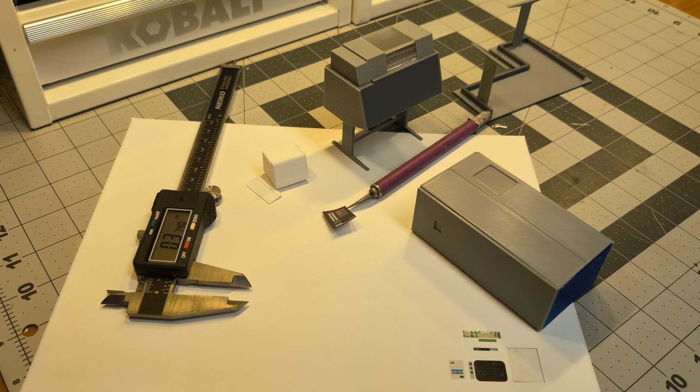So exactly what am I doing here? Well, it occurred to me that if I'm going to have a mainframe channel called My Little Mainframes or Ernie's Little Mainframes or what have you, I probably should have some little mainframes.

And I got an idea from Nicholas Timisi's wonderful little 1401 model that he created, which I featured in one of my videos. I think it's the third or fourth video, maybe the third video.

I have several 3D printers which I use for all sorts of different projects. When you're like us, or anyone who's watching this channel, you're probably into all sorts of fun tech things and tech history, and we're curious to a fault, as they say. Well, that's me. So I have my 3D printers, and although I wouldn't call myself all that good at designing, I'm not terrible, and that's just my opinion.

I use a little product called Tinkercad, which is dirt simple, free, online, doesn't require anything, but you go to the website, you sign up for it, and off you go. It's from Autodesk, which makes the venerable AutoCAD software, something that I have had decades of experience with.

I was an AutoCAD professional back in the 90s. I even taught AutoCAD, I even had all the certifications. I went so far as being on the board of the people who wrote the AutoCAD certifications, and traveled to San Rafael, California on a number of occasions, but that's a different life. Now as a retired guy, I have lots of time to play with all sorts of fun stuff, and this is exactly what I'm doing.

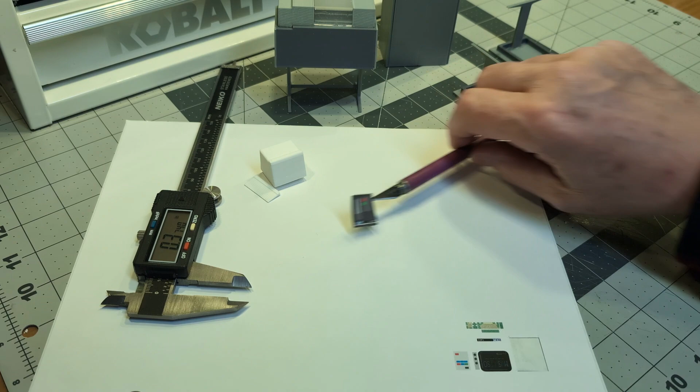So here is my little set of prints, and right here we have what will be in a moment a little 3090 mainframe. This is a cool little 1403 printer, not so little in the real world. And right here I have a desk, but it is currently gluing. Using this wonderful stuff, the E6000. Don't get this on your pants, whatever you do, because it will never come off. But you can glue all sorts of stuff together with E6000.

Anyway, what I had been doing was using various graphic tools. Actually, one of the best tools in the world is just good old drawings.google.com. Google makes some essentially basic but rather usable products that you just use online if you have a Google account. One of the things I did was mock up or create a little graphic set from all sorts of resources on the internet, popping stuff in there and shrinking it down.

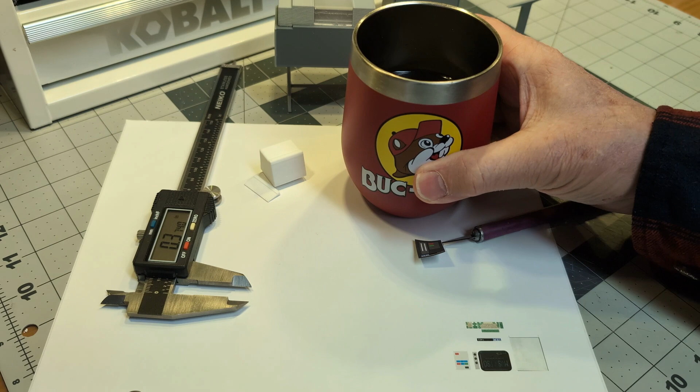Excuse me for my hands, but I talk with my hands, as it were. Oh, and hang on one second here. If you've been watching my channel, if you've been a stalwart follower of this fun stuff we've been doing, here it is. There she be, the Buc-ee's cup with the Tim Hortons coffee. I don't know how I thought this up, but we all have our vices, right? Hold on.

Anyhow, so I mocked up the graphics on paper, and then I got some really pretty cool stuff here. You can get this for $12 on Amazon, the Avery full page stickers. Now the full page stickers have no separations, there's just an entire page of sticky paper. So what I did was print this once I was satisfied with the size, carefully cut it out using the X-Acto knife, and try not to go through the backing paper, but you can. Reusing this over and over until, of course, I used up all the space.

So here we are, here's a little decal. Here's the front of the 3090. You can tell your friends that this guy who has this little mainframe channel is a whack job, because after all, who would go through all this? I do. I think this is more fun than a barrel of monkeys, and I've never seen a barrel of monkeys. So anyhow, here's what I'm going to try to do: get this on here so that it doesn't run all over the place. There she is. What do you think, gentlemen?

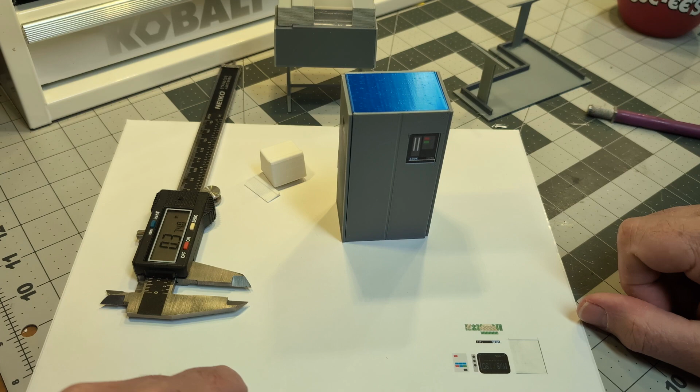I'm pleased with this. Now, one thing I did was I printed this in what they call speed mode, which means it's not really great. You can see there's a lot of serrations, but this is just for fun. If I really wanted to perfect this, I'm not sure I do, because there are so many other models of things I want to print, mainframe related and so on.

This is just for fun. Your friends don't have this. Nope.

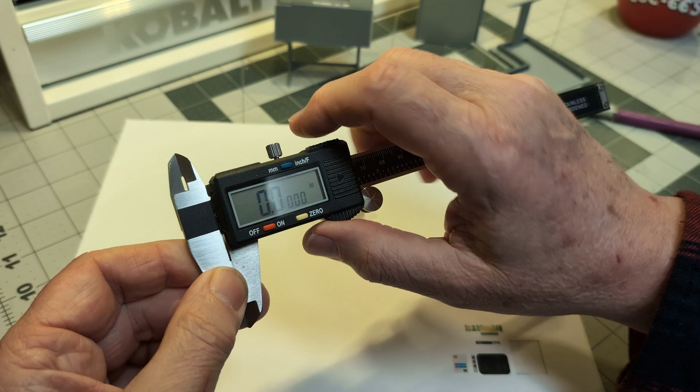Let's try this here. Let's just see how hard this is going to be to do. A little bit of care here. Watch me foul this up rather nicely, but we'll see how this goes.

If you're a model maker, and I have lots of time under my belt as a model maker, you know that you just don't slice away. You have to finesse it. You have to be careful with it. You have to treat it nicely, and then it will do what you want it to do.

So 2 or 3 runs over this with the X-Acto knife. Always have a sharp blade. Sharp blades are the key to happiness. Dull blades are the keys to losing your finger.

Okay, almost there. We'll see how this thing goes. Almost. I'm feeling a little bit of drag, which means a burr is starting up on the X-Acto knife, which I don't want. Can you guys see that okay? Man, I'm a little bit too far under here. Let's just try it from here.

All right, hang on, almost done. The sound of my voice. Okay, all right, let's peel this guy off. And no, I went through. Even I'm not that good, but we'll see.

Well okay, here we are over at the computer, and this is Tinkercad, and Tinkercad is free from Autodesk. I think originally the purpose of Tinkercad was to lead people into the Autodesk line of products, which in and of themselves are rather expensive. And for most people who are not doing this professionally or in a production quality environment, you can't justify the cost of some of these products. But there is a product called Fusion 360, which you can use.

I don't particularly care for it, and it's not because it's not capable. Oh, is it ever capable? I just don't care for the workflow. And if you are in this kind of environment, you know that workflow is everything. If you're frustrated and not happy with the way your workflow works, you're not going to be happy. So I didn't particularly care for the workflow, even though I took some of the online classes from Prusa, which is my 3D printer supplier of choice. I do love my Prusa printers.

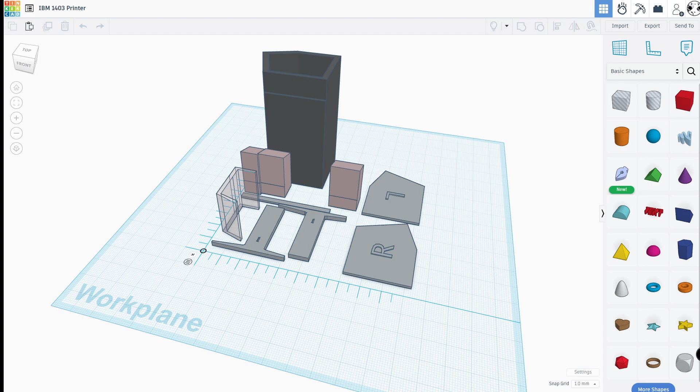I decided to stick with Tinkercad, and a number of people I know do the same. Even though it may look, for lack of a better word, childish, it is, I repeat, far from childish. Anyway, here is the 1403 printer that I designed, and really it's just a basic thing here.

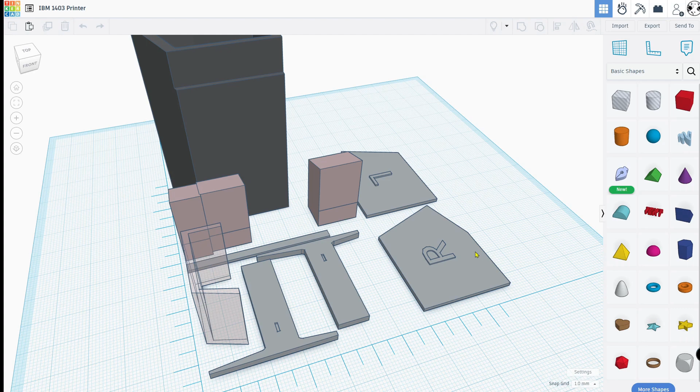It is all the pieces that would go into the way you would construct some object. How can I put this easily? You just have geometric shapes that you stick together in such a way that in the end it turns into what you want. And you add them together and take them apart and do all the things that you do until you have the piece that you want.

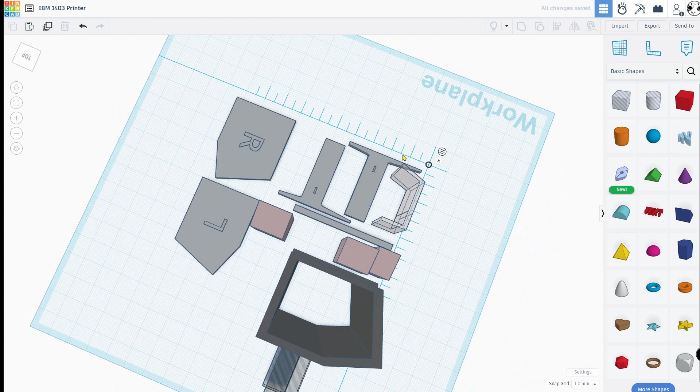So for instance, here's the main body of it. And I cut a hole in it because who needs to have a big thing full of plastic? And what I can do then is break them down into their constituent pieces and have my way with them until they look as I want them to be.

So, for instance, these two little things sticking out here, they're not actually the legs. They're just the thing that tells the computer or the design to take some space out of this black thing to make room for the legs. The actual legs are over here.

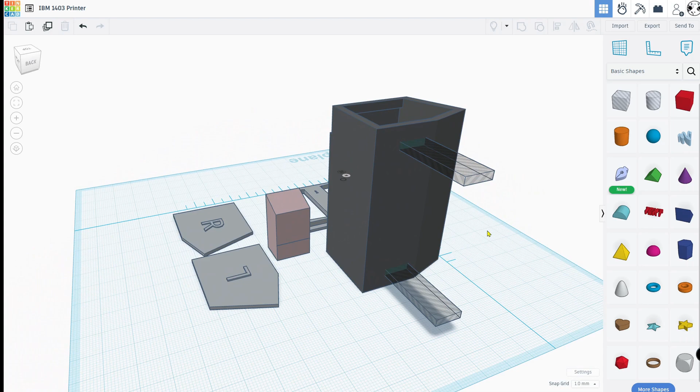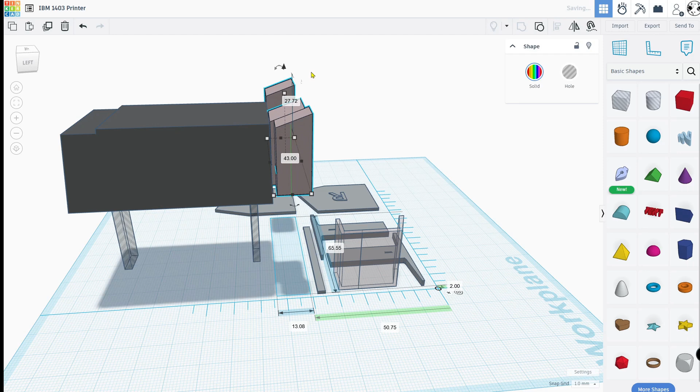This is not going to be a class in Tinkercad, but all I'm trying to say is there is a way to make things without losing your mind, and this is my design tool of choice. Hopefully you can see how this is starting to show what it's going to be here. Real quick, I'll finish this, and then we'll get off of this because it's not really mainframe related, I know I'm going somewhere outside of that scope, but I think you'd find it kind of fun to see.

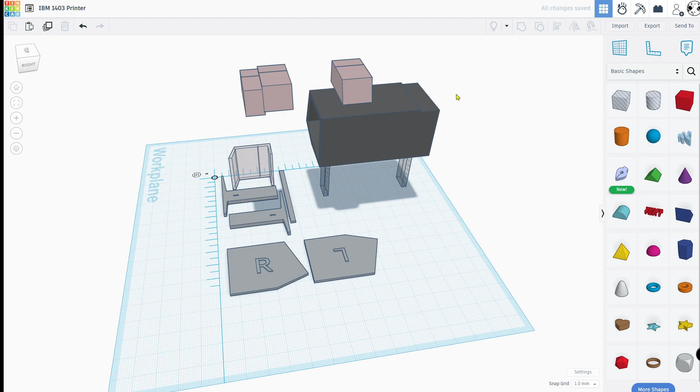All right, let me just finish doing this here so we can play with it. Let's turn this around completely the other direction. Don't worry if it doesn't make any sense — it doesn't make any sense to a lot of people. Let me see if I can make everything align properly. Probably can. You see how this is coming together?

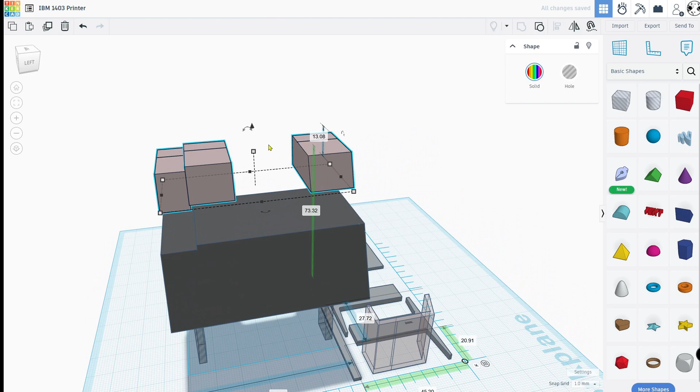And then I just sort of drag this down to the top and say, all right, let's have a look at that and make it a little bit more flat to see. And there it is. That's how you do it. It's not really rocket science, is it?

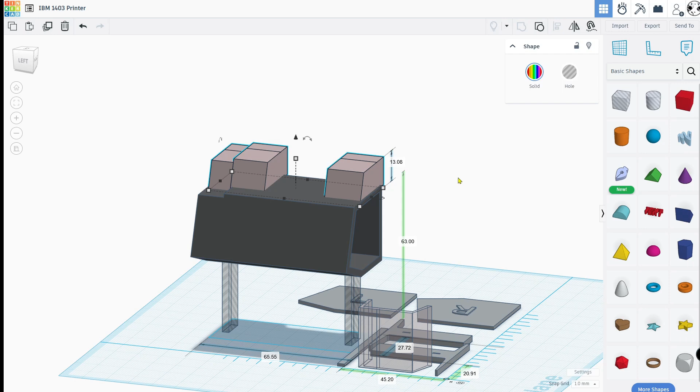So I just sit there using pictures that I find all over the place and the IBM documents and manuals and everything, and I put together what in this case is going to be, or was, a model 1403 printer. The STL files mean that if you have a 3D printer, or know someone who can do this for you, all of the constituent components — like the side panels, the legs, and even the clear glass that goes in between where the paper would come out — are all available in the links that I'll put there.

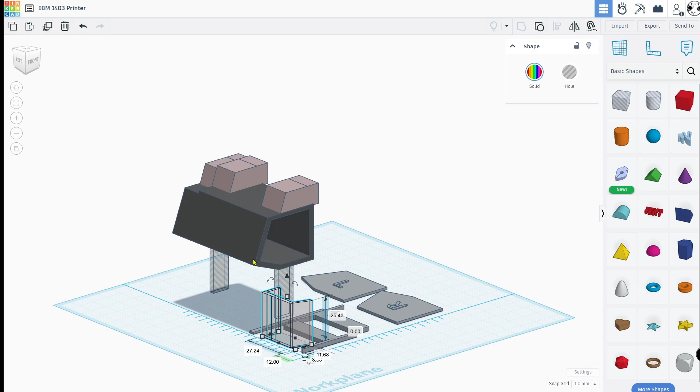And if you know somebody who wants to try this, have at it. The only caveat is caveat emptor — this is for fun. So if it's not going as you'd hoped, if I can help, that's great, but I really don't know how. This is kind of what you see is what you get.

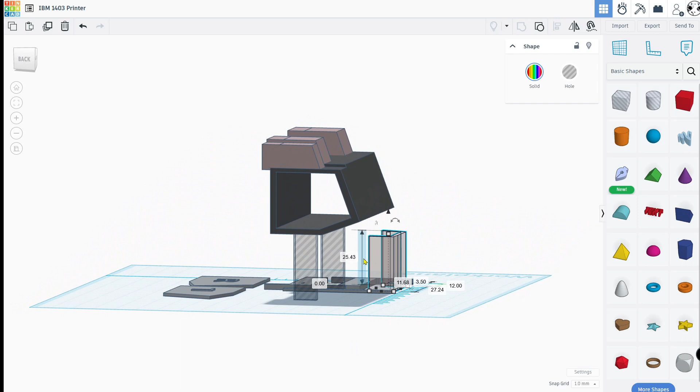Anyhow, that's how I'm making my little mini mainframe installation, my data center, with Tinkercad. Pretty cool, huh? I think so.

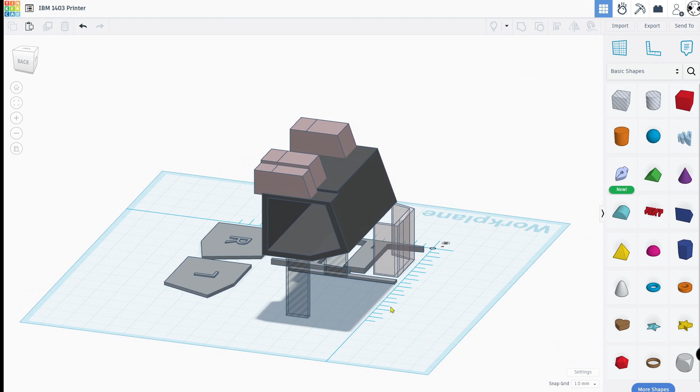And let's go over and actually create the final product here. So once you have everything that you like and things the way you want them, you can do something with them to make them go to the printer. So let's say here I want to take these two pieces right here and print these. I have them marked L and R so I can figure out which side they are.

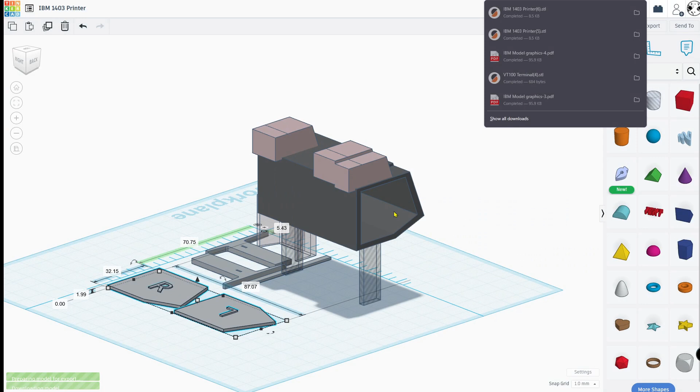I say export, and this is the thing called the STL file, which is basically a set of instructions to your printer. Then I double click on that and open up the printer doodad here, there it is. And that is what goes to the actual printer itself, as though this thing here was the actual print bed that this thing squirts all of its plastic onto.

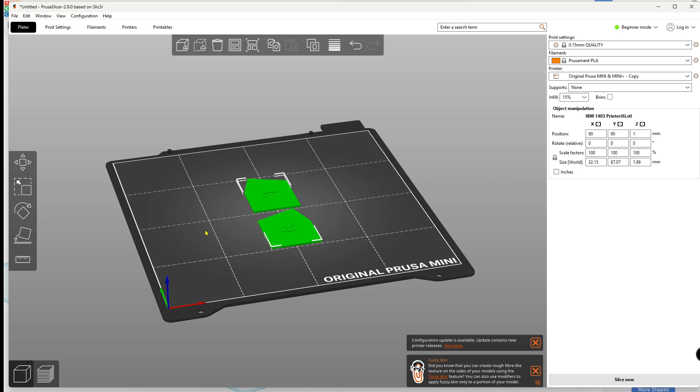Because if you think about it, a 3D printer is nothing but a super accurate hot glue gun. It really is, that's all it is. So I can move these around, rotate them, have my way with them. And once I'm happy with it, I then do this thing called slicing. The slicing takes it and makes all the little pieces, tells the head everywhere it needs to go to create the shape. That's it, not much to it.

All right, let's pop out of this and make this a little shorter than usual, and just summarize what I want to do with this so maybe you can see the logic behind all this. If there is any logic — there very well might not be.

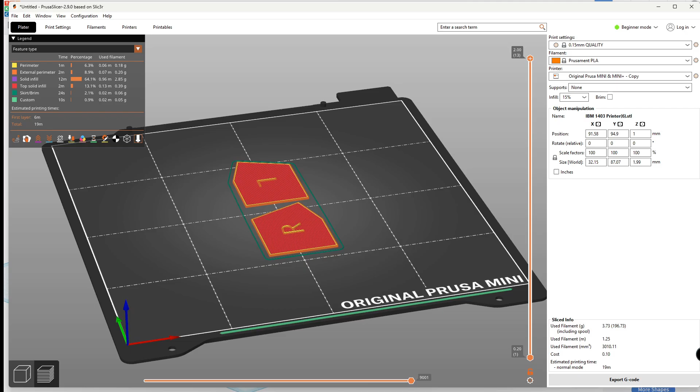Well, we're not quite done yet. What I did want to talk about was the graphics. So here is what I've done, and it's nothing more than cutting and pasting all sorts of different sources.

If you go online and search for every picture of the Model 1403 printer, it'll come up with all sorts of stuff. Most of course is black and white, but you can find things you can use as a source for horsing around. One thing you can do is a screen grab, cut and paste, and just build these things up until you get what you want.

So if I really zoom in, let's do 400%. Now we're in there, get over to where I need to be. You can see what I did - I grabbed things from the internet, and I used other built-in things. For instance, if I ungroup these, the individual pieces become available for me to change the color.

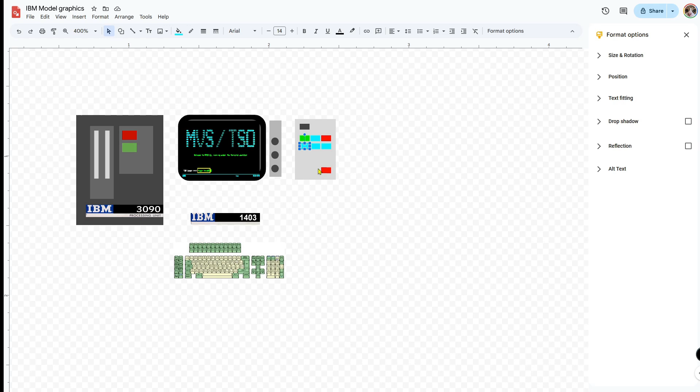All I have to do now is print this to the color printer, an inkjet printer, onto that Avery sticky label stuff, and I'll be able to affix it to my models. Same thing down here, for instance.

Boom. So I found this on the internet, and it's a kind of 3D looking keyboard. It's got all the function keys. This is the actual keyboard you might see on a 3270 terminal - the real deal.

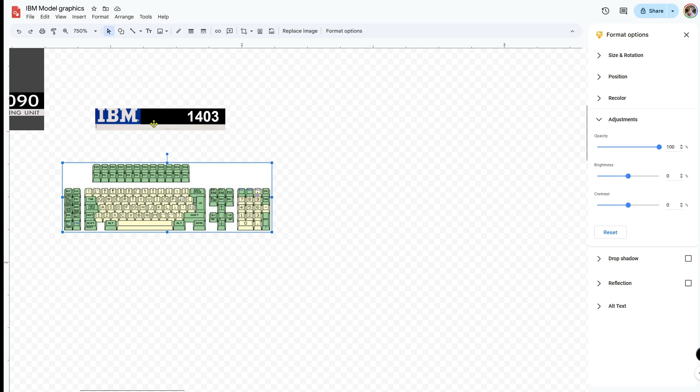Same thing with this, the IBM 1403. All I did was cut and paste it and put a little graphic on there of the 1403. Same thing, nothing special, up here too. If I ungroup these, you can get to the pieces and move them around to your heart's content.

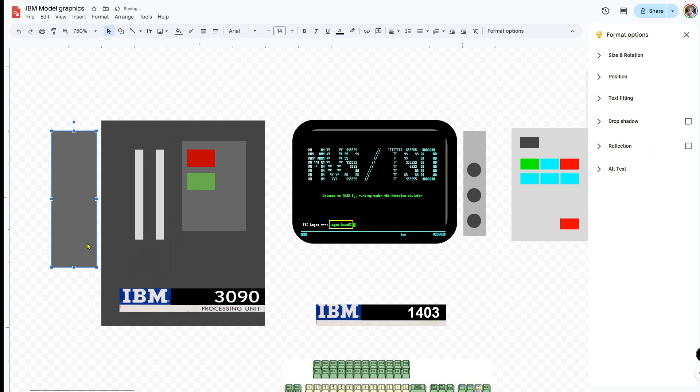So if you wanted to do this kind of stuff, you don't have to spend money - except for the 3D printer, of course, and the stuff you print with. But that's really cheap. The filament for a 3D printer these days is really inexpensive. I've purchased a lot of generic stuff from Micro Center, Amazon, and so forth, and it runs just fine for like $14, $15 a roll, which lasts a long time.

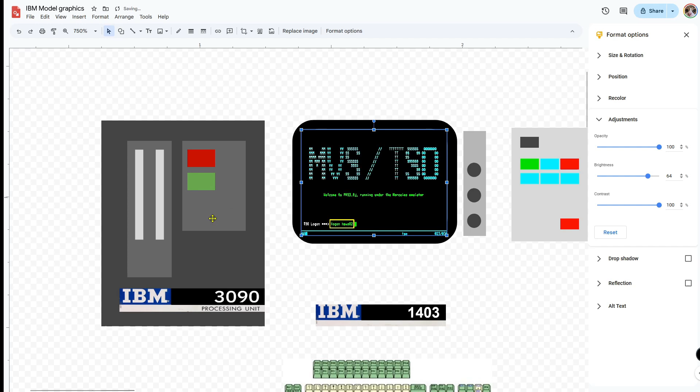This was something I just grabbed off the internet - I think we've all seen this - and shrunk it down until it more or less fit in the spot, then you can use your keys to move it around. I don't mean to drag you through this boring stuff, but I wanted to show you that except for the 3D printing investment, which for that little mini was about $450, bought about a year and a half ago as a little present to myself, everything else is free.

And if you have a Google account, this stuff comes with it - nothing special. The slicer from Prusa, that's free. Tinkercad, that's free as well. Not a heavy investment to have some modeling fun, and I think this is a great way to expand on my little mainframe obsession, which has been going on for quite a while.